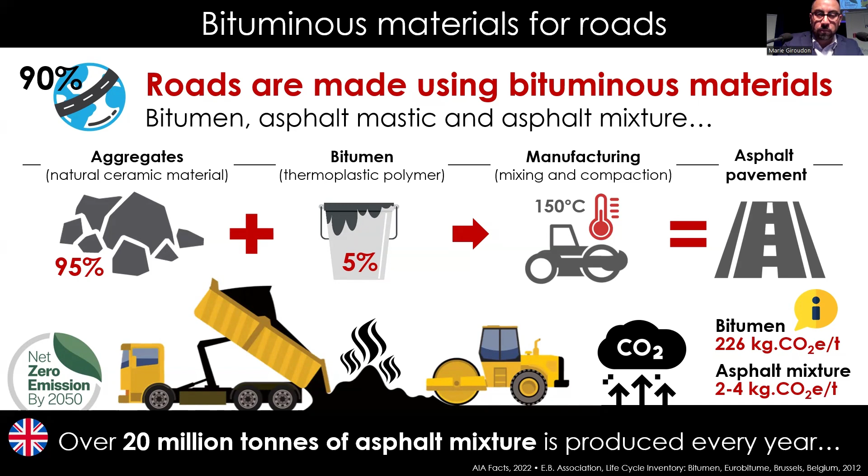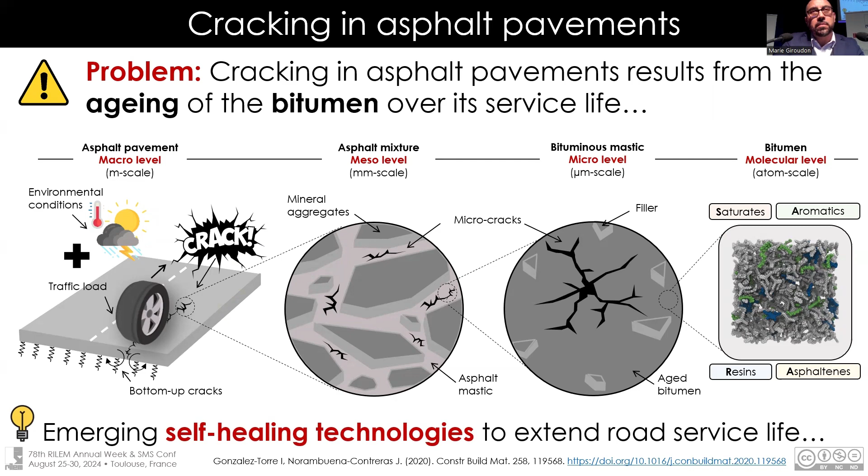To reduce this problem, in this keynote I'll discuss emerging self-healing technology to extend the road service life. Let me show you more detail about that.

At this point, the question is, what is self-healing asphalt? The key is the bitumen viscosity. Bitumen is a thermoplastic polymer with thermosensitive properties. Basically, bitumen is solid at road temperature, but when you increase the temperature, it can flow and close the opening of the crack autonomously.

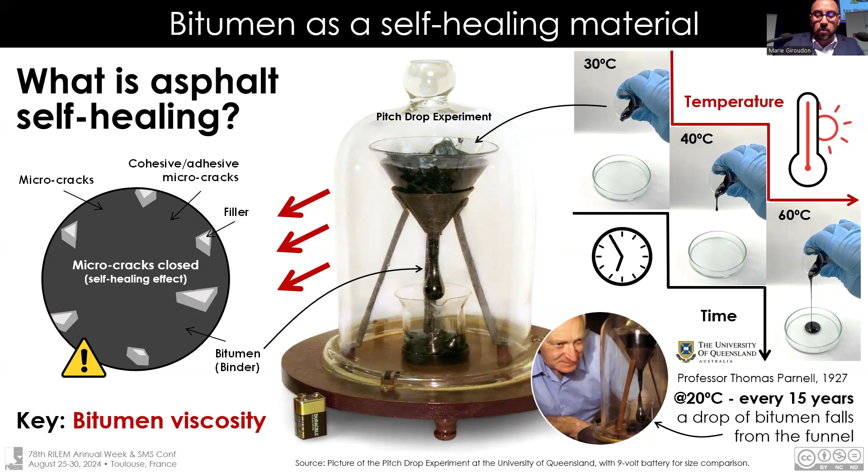So basically, we can produce self-healing materials. Bitumen is a self-healing material itself. But to increase this property and its application, we need to design different emerging technologies using extrinsic self-healing technologies.

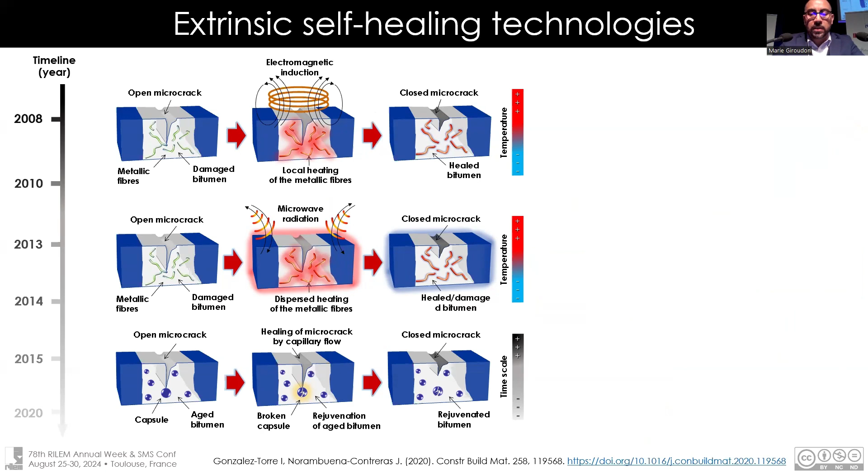To promote the healing properties of bitumen, we can use three different extrinsic technologies, classified into two groups. The first group concerns external heating. Here you can use induction heating: the asphalt mixture contains several ferromagnetic additives that are exposed to electromagnetic fields. Basically, you can increase the temperature of the bitumen and promote flow inside the open crack autonomously using this technology.

Another one is microwave radiation. You can incorporate metal or no metal, and it's effective either way. It's exposed to an electromagnetic field using radiation.

The next technology is encapsulated rejuvenator, an autonomous approach. Basically, you produce capsules with rejuvenator, an extender oil rich in components, with aromatic components, to stabilize the saturate-aromatic-resin-asphaltene ratio inside the bitumen. The broken capsule releases the contained rejuvenator inside the asphalt mixture, which reduces viscosity and improves the aged bitumen by diffusion, sealing the open microcracks.

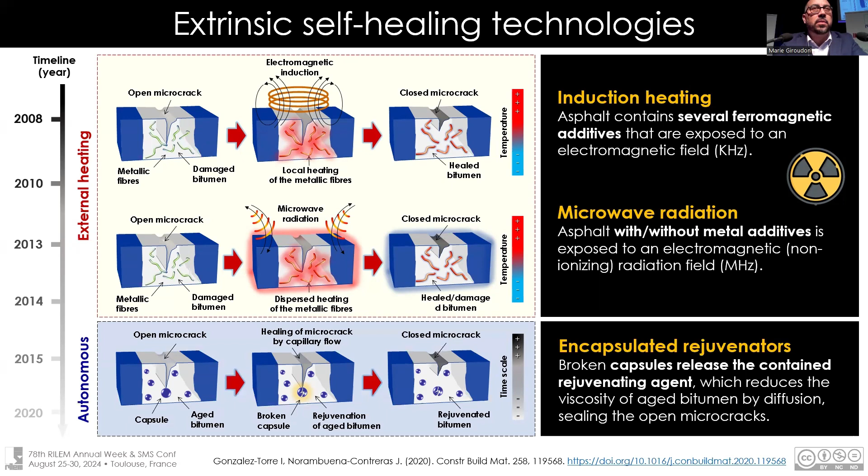So basically, using this technology, the concept of road maintenance and preservation over time has been refined. We need to extend the service life of the road, incorporating different emerging technologies to extend the service life and reduce CO2 emissions from asphalt mixture production and maintenance.

At the same time, if we evaluate the publications on this topic in the recent years, the last 15 years, we can conclude that this topic has grown exponentially.

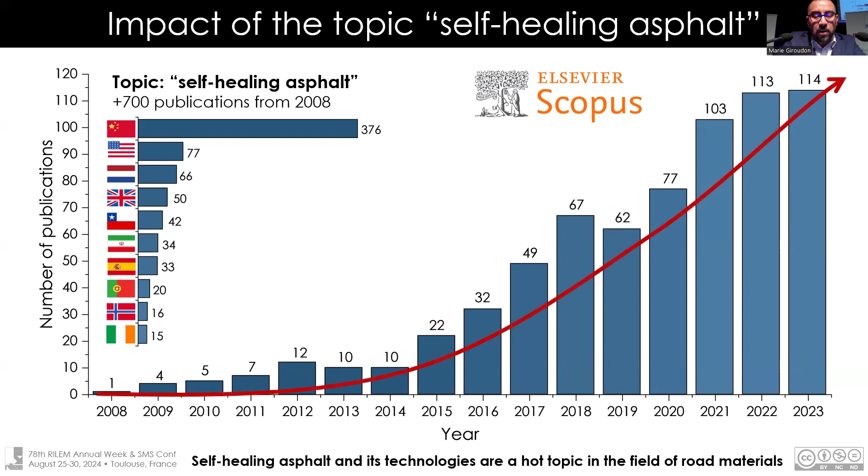Let me show you. Self-healing asphalt, in summary, is a hot topic in the field of road materials. I strongly believe that using waste sources combined with valorization processes, you can design new materials for asphalt and bituminous materials.

At the same time, you can contribute to different sustainable development goals, number 9 and number 11, to produce advanced transportation infrastructure, combining material science, civil engineering, and chemical engineering to produce self-healing materials.

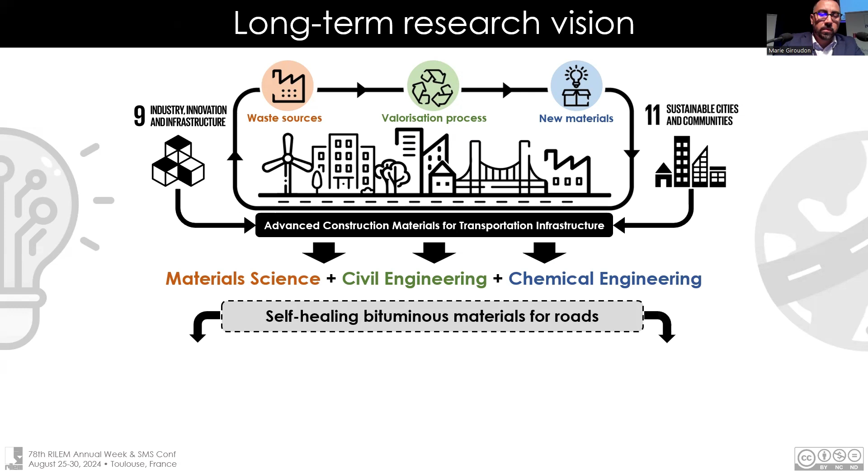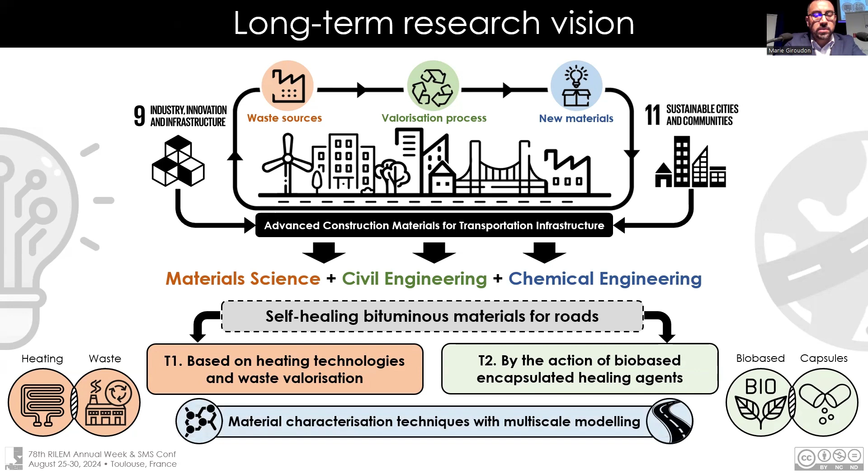This big research can be carried out using two different topics. The first topic concerns external heating technologies and waste valorization to produce self-healing materials. The second one uses bio-based encapsulated healing agents to produce self-healing materials. Both topics are carried out using material characterization techniques combined with multi-scale modeling to resolve both problems.

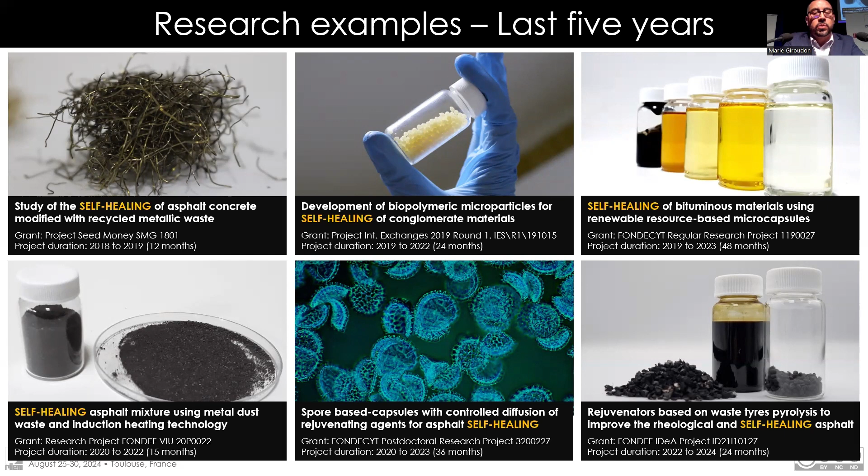For this presentation, I have selected 6 different projects to show you a brief overview of the research concerning self-healing asphalt.

In the first part, let me show you a few examples concerning the external heating approach. For example, we can use 3 different additives: electromagnetic additives, steel fiber from the cleaning industry, steel shavings from the manufacturing industry, and fibers from the tire industry. Basically, all these additives can potentially be used in asphalt mixtures for heating purposes.

Obviously, when you study the material's microstructural properties, you can complement designs and incorporate the new materials inside different applications.

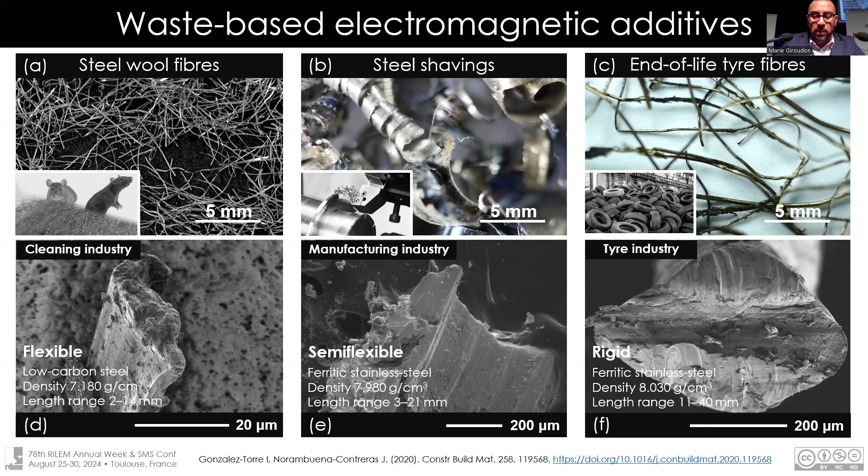During my time working in Switzerland at EMPA, during the last year of my PhD, we designed the first self-healing material applied in dense asphalt mixtures. For this purpose, we used steel fibers and induction heating.

Basically, to evaluate these materials, first we generate artificial cracking using mechanical testing, for example 3-point bending tests. It's also possible to use fatigue tests, depending on your purpose.

Then we use the pieces of the sample, piece them together in this sophisticated support, and then heat them under the induction coil without contact.

After the sample is heated for a few seconds, you can stimulate the bitumen inside the materials, and you can promote the flow autonomously inside the materials.

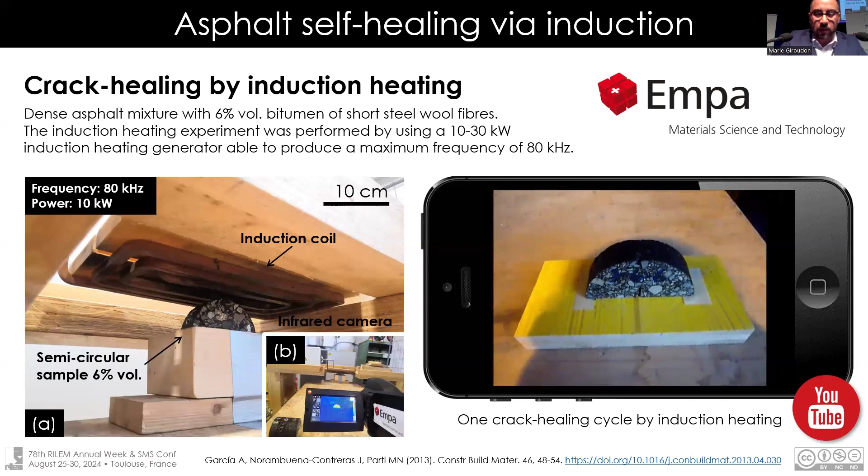After the sample cools to room temperature, we can manipulate it and check that the crack has been healed. Let me show you.

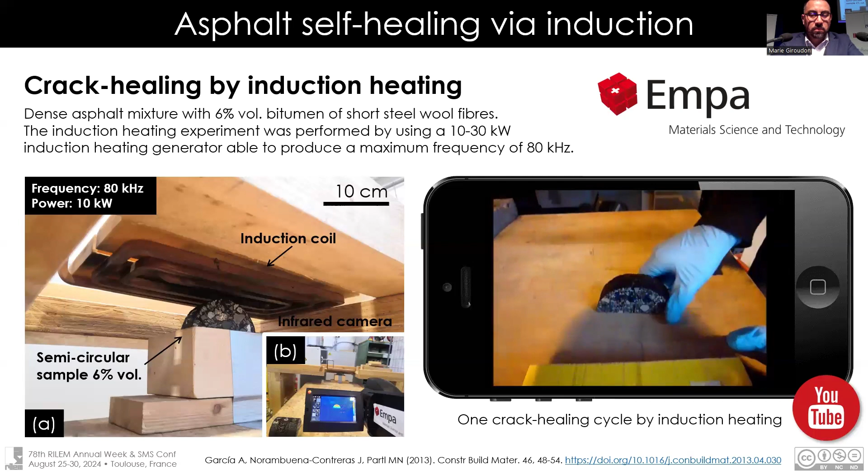But obviously, we must quantify the healing index before and after heating using mechanical properties, using different indices in order to evaluate the self-healing properties.

These samples contain fibers, steel fibers explicitly, so it's important to evaluate their distribution within the samples, for example by using computed tomography.

The recommendation, after evaluating 1,000 tests, is to use short fibers at a low addition percentage with a diameter close to 0.2 millimeters.

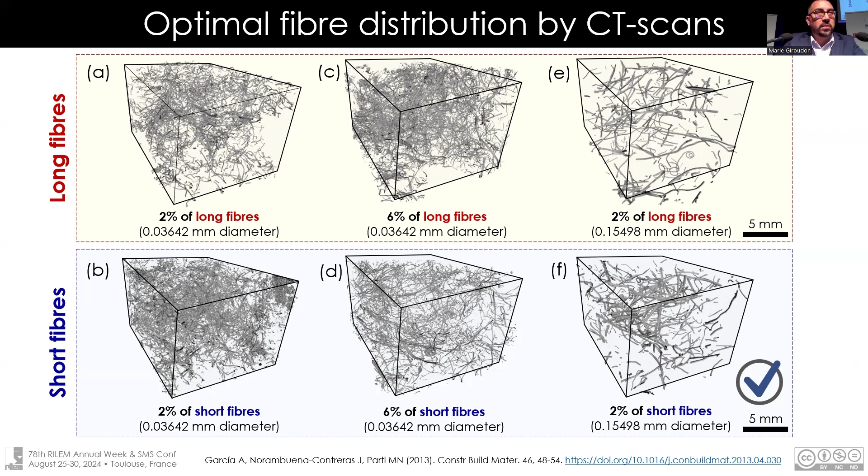On the other hand, it is also necessary to evaluate the heating time of the sample using microwave radiation in order to compare with induction technology. Thus, the effective amount and optimal time allow us to compare microwave radiation with induction heating.

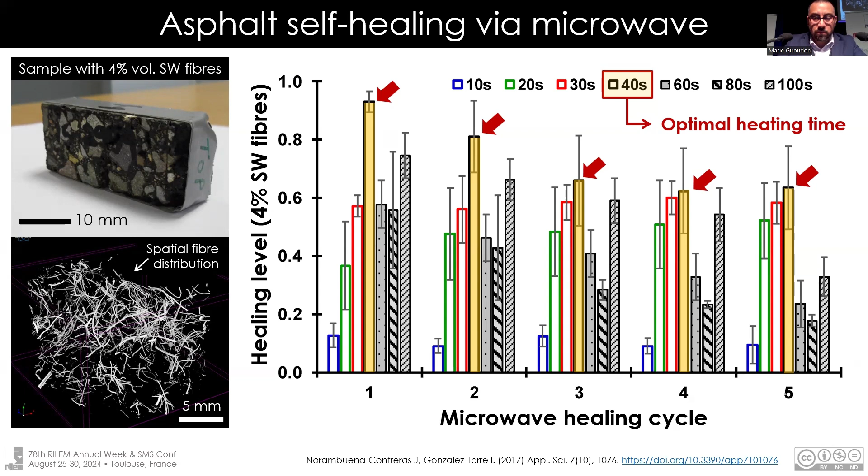For that purpose, it's necessary to design pretty easy tests in the lab. Basically, using a microwave oven, you can heat samples, not your food, please. After that, you can evaluate using a camera the temperature distribution inside the materials over a specific time, in order to evaluate the closing of the crack autonomously by effect of the microwave radiation.

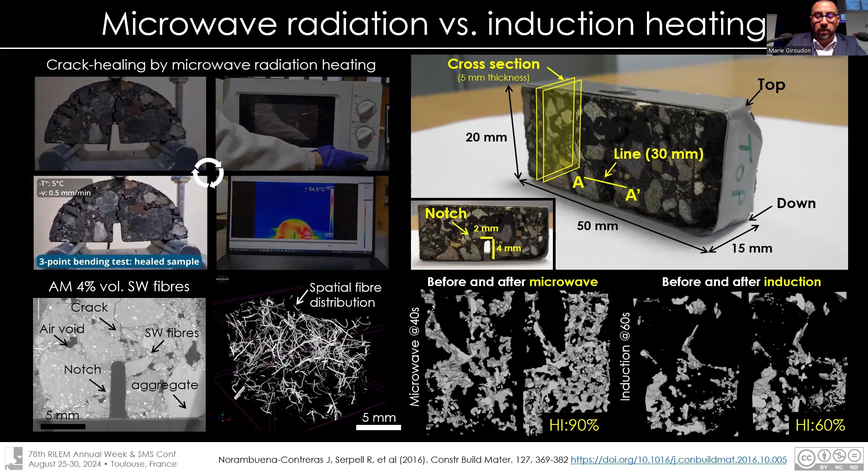You can also compare this result, the time and energy, with induction technology. Comparing both heating technologies has shown that microwave can achieve a higher healing index over time, but they can also affect the microstructure of the asphalt mixture.

For example, you can produce hot spots when you expose the material to high temperature. The recommendation is to use induction heating in on-site conditions without affecting the asphalt mixture performance.

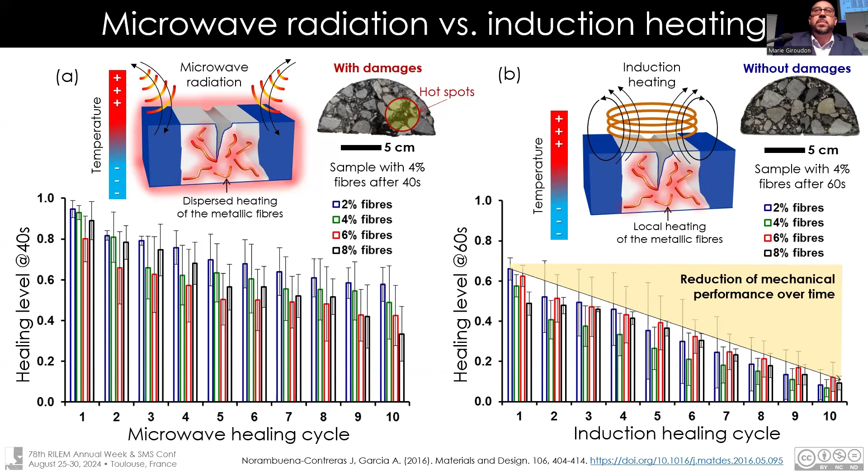Another example is to use steel shavings from metal manufacturing inside the asphalt mixture. In design, everything is possible - all kinds of waste can be used for asphalt healing purposes.

In this case, this additive can also be combined with the use of reclaimed asphalt pavement to produce a more sustainable mixture. In this research, we compared both materials, the reclaimed asphalt pavement with a small addition of steel wool fiber and steel shavings, to increase the temperature inside the material using these waste material aggregates.

At the same time, we can use steel fibers to stimulate the materials, but this fiber is so complicated to work with because it's necessary to produce several modifications in the mixing process to obtain a very good asphalt mixture. But it's possible to heal the samples.

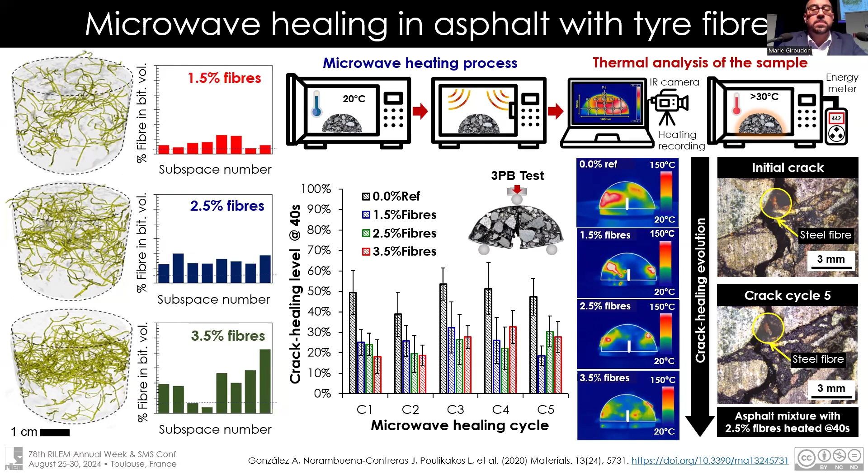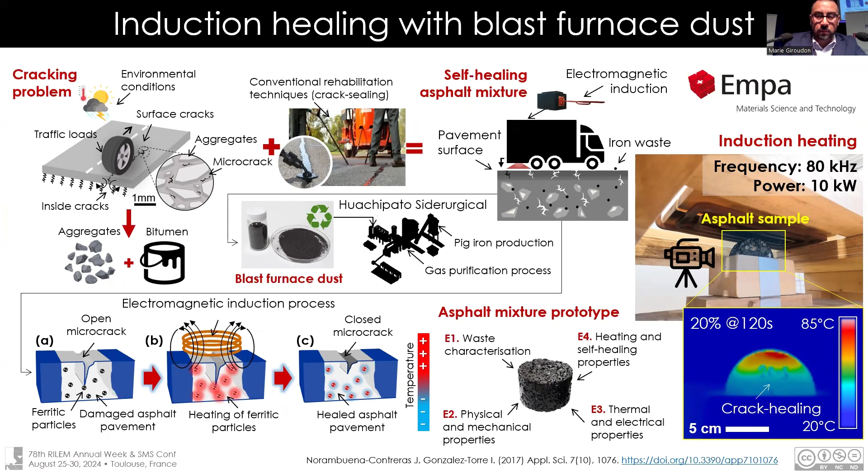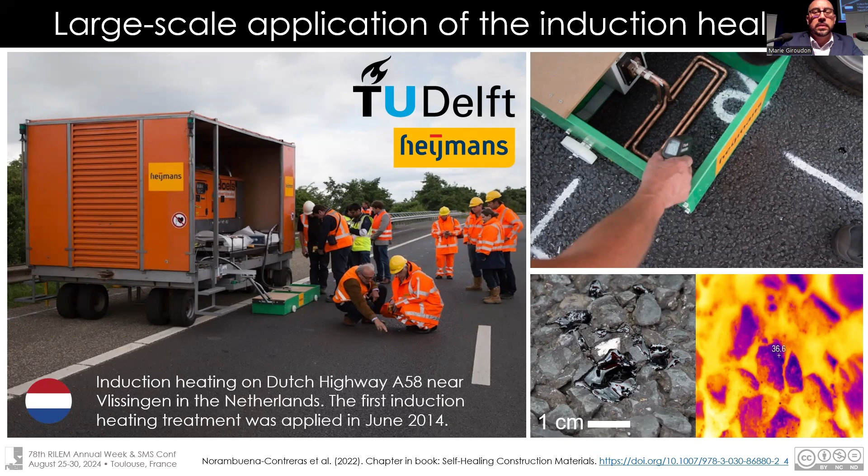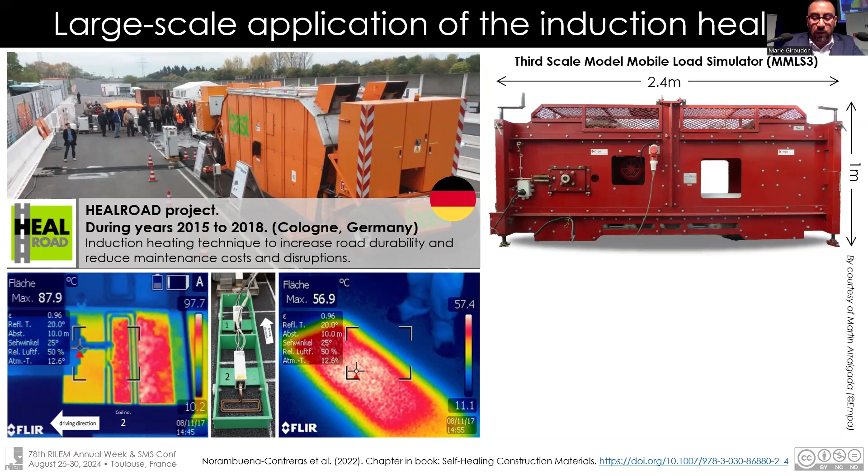The second example is a large-scale application recently carried out in Germany, a more current example. In this case you can simulate real cracks on the surface of the roads, and after that apply induction heating in order to close the crack autonomously. At this point, the encapsulated rejuvenator technology becomes necessary and very useful for healing purposes without human intervention.

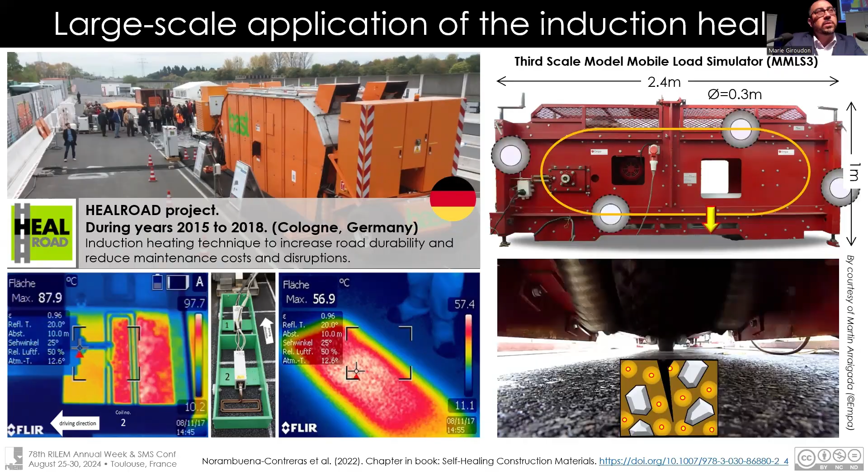In the next part of the presentation, let me show you a few examples concerning encapsulated rejuvenator resources. Under my vision, the following equation can define the preparation of the encapsulated rejuvenator for more sustainable roads.

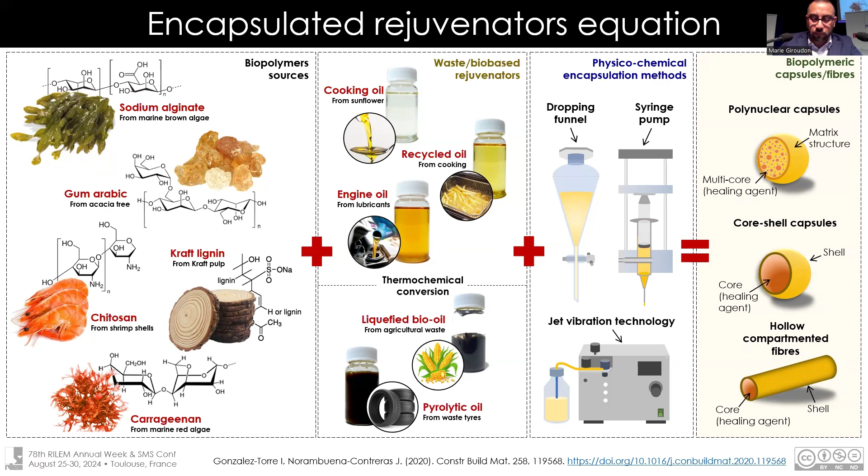Combined with physical-chemical encapsulation methods, you can produce several biopolymer capsules with different purposes, such as polynuclear capsules, core-shell capsules, and fibers. In summary, you can prepare different types of capsules by combining these materials and methods.

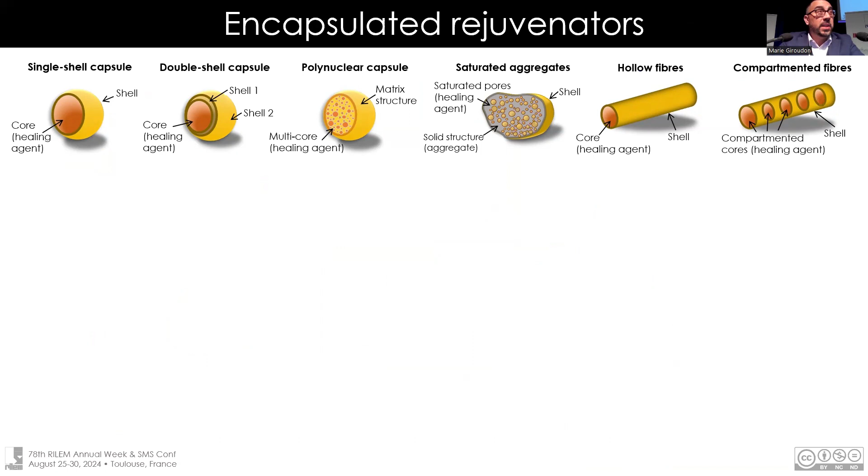Due to time limitations, let's look only at polymer capsule examples. Remember, the capsule releases the rejuvenator with reduced viscosity, and the aged bitumen seals the opened crack by effect of an external trigger - mainly a pressure or a traffic trigger.

When you produce capsules, it's very important to design very good emulsions. The emulsion is a combination of the polymer, rejuvenator, plus water. This is very important in order to achieve a very good capsule, in this case polynuclear capsules. At the same time, different physical parameters are interesting to analyze, such as the creaming index in the emulsions and different properties.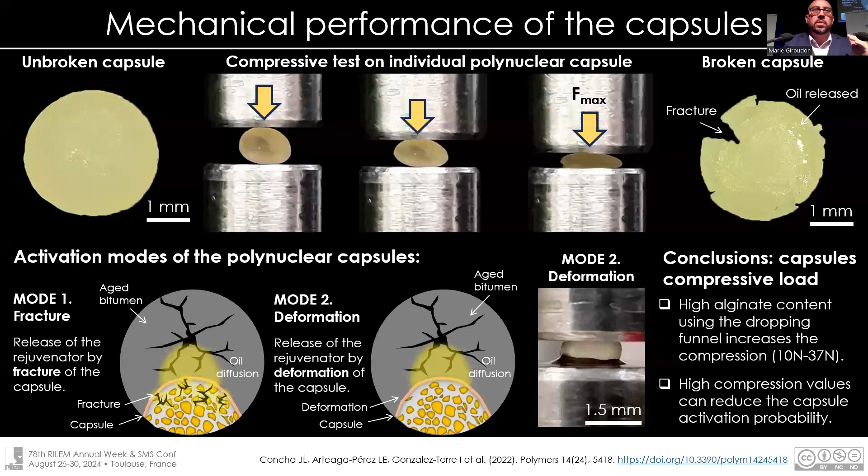Because a polynuclear capsule is like a foam, when you apply pressure you can release it in small amounts several times, depending on the traffic. For that reason, you can produce breakage of the capsule in the first mode, and in the second mode you can produce deformation over several times.

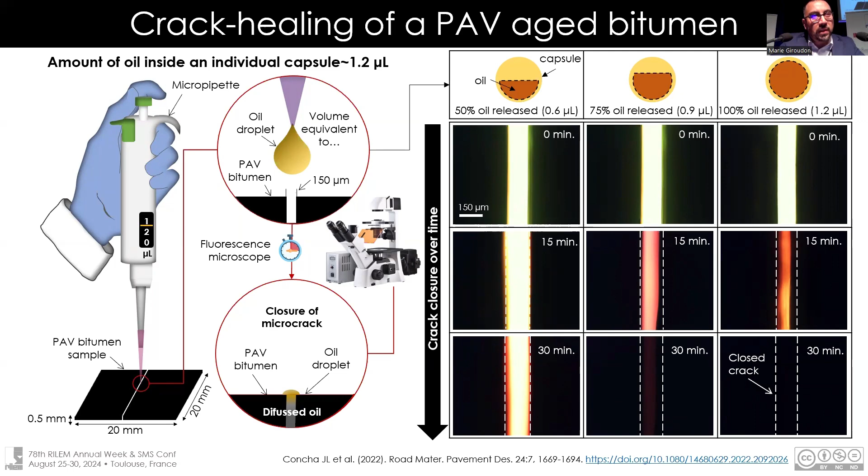Thermostability condition of the capsule is so important because you can produce asphalt in hot conditions, but the capsule needs to survive inside the asphalt mixture. You can complement the capsule with different solutions in order to increase the mechanical property and thermal resistance. Basically, the capsule resists the asphalt thermal condition and the asphalt compaction conditions.

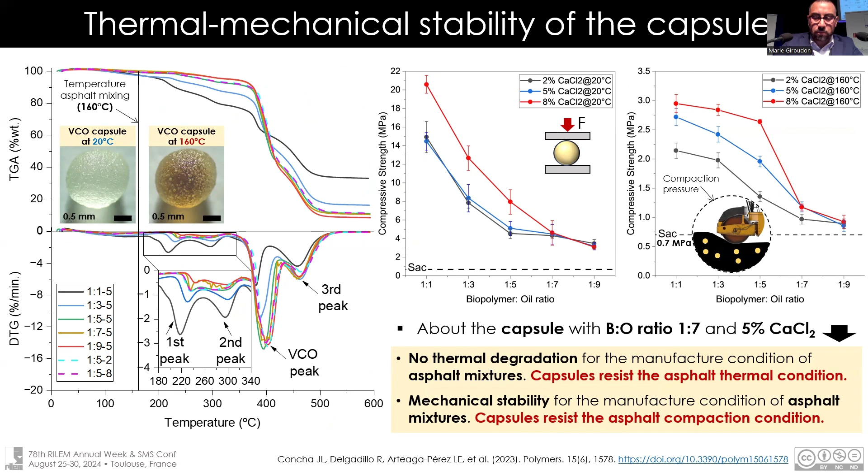Several tests using mastic. Mastic is a combination, in this case, of bitumen plus small pieces of aggregates and capsules. You can evaluate the rheology properties of the mortar because it's important for evaluating the mechanical behavior of the asphalt mixture in real conditions. We can modify and improve properties using capsules, but you need the exact amount of capsule in order to avoid effects on asphalt performance.

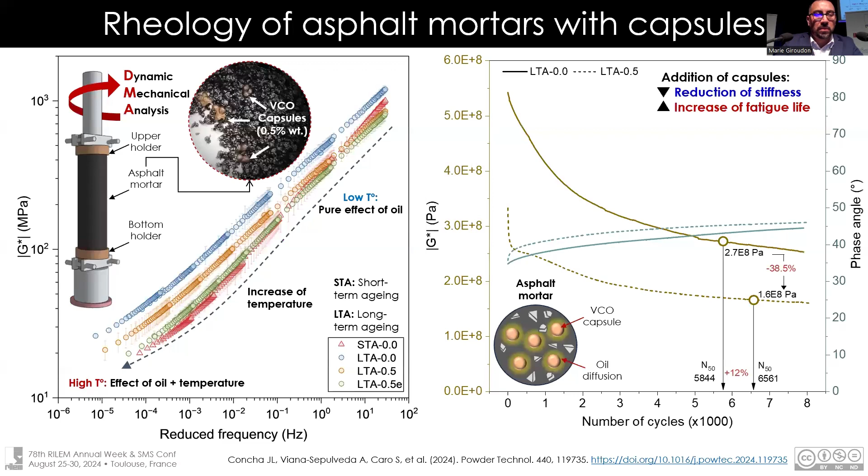Another challenge is to design new tests in order to stimulate the capsule inside the asphalt mixture. You can design capsules, that's fine. The next step is to incorporate the capsule inside the asphalt mixture, that's correct. But what is the next step? It's to activate the capsule under laboratory conditions.

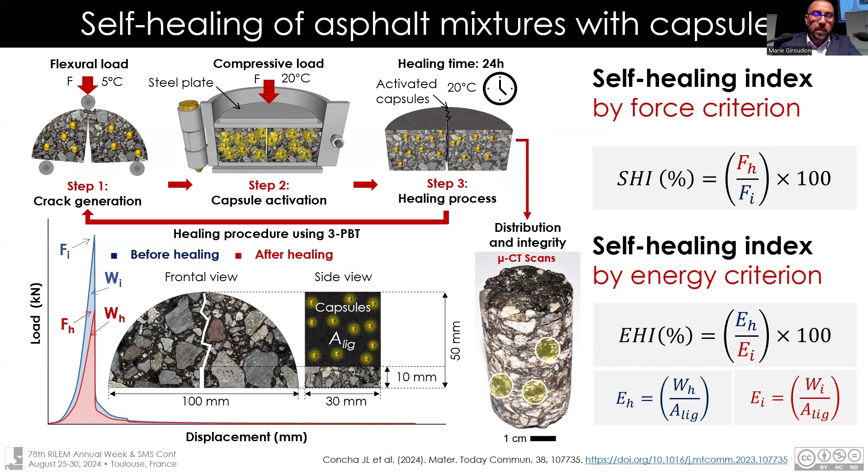For that reason, you need to design a specific test using mild compression in static and dynamic conditions in order to stimulate the capsule inside the asphalt mixture. After that, you can design different self-healing index by force criteria. You can calculate the curve, and the area under the curve in order to use the energy, for example. Independent of the healing index, you can increase the self-healing index inside the asphalt mixture.

Please remember that bitumen is a self-healing material itself. For that reason, you always need to compare your results to materials without additives. In this case, we can increase up to 20% of the healing index compared to asphalt mixture without capsules. When you use, for example, the self-healing index using force, this result can change when you compare it with the energy.

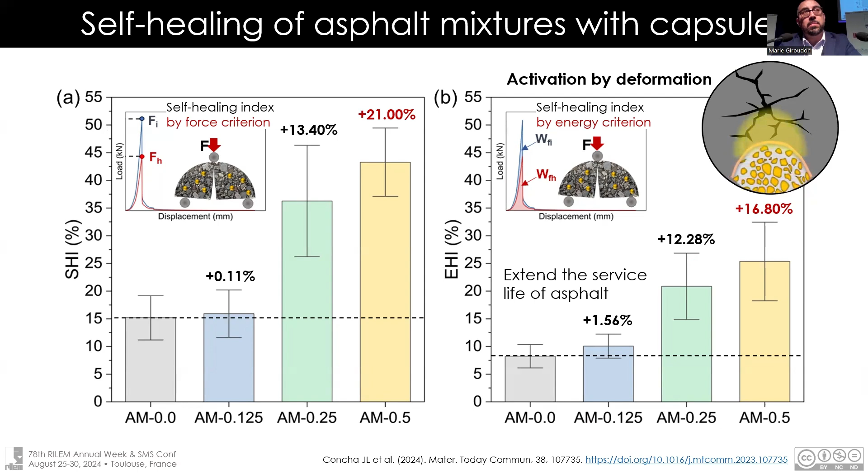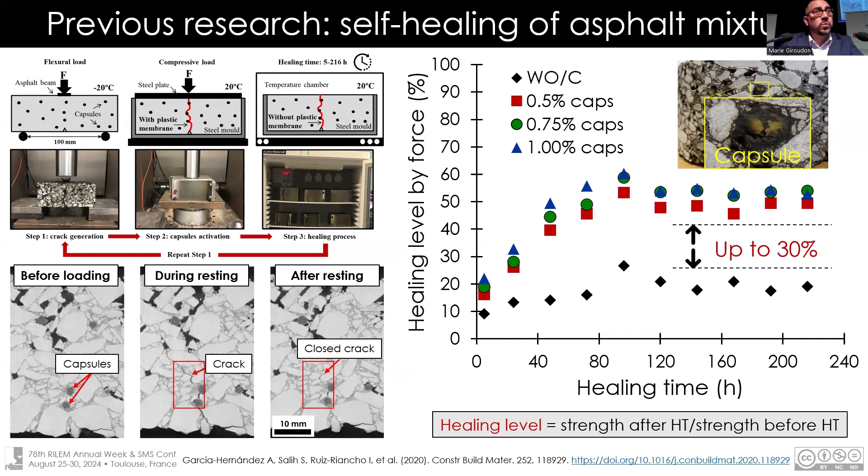This is very difficult to simulate in laboratory conditions. At the same time, you can use CT scan, computer tomography, to evaluate the distribution of the capsules inside the asphalt mixture.

For example, you can delete the different aggregate mastic and see the distribution of the capsules inside the core of the asphalt mixture. You can evaluate the distribution of the capsule, the diameter of the capsule after mixing and compaction, and also evaluate the effective distribution of the capsule.

Basically, the capsule resists the mixture manufacturing process. The capsule breaks inside the mixture due to the effect of extrinsic loading, in this case static condition or fatigue conditions. The capsule shows a very good distribution inside the asphalt mixture. But what is the next step?

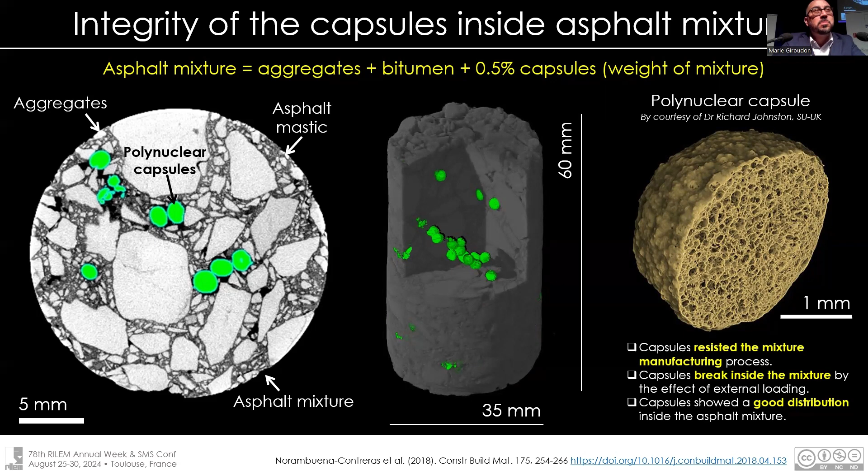The next step is to anticipate the performance of the capsules. You can use CT scan, but also different computational approaches to design a virtual model of the asphalt mixture with different combinations of capsules. You can simulate dynamic tests using finite element methods in order to evaluate the probability of the number of capsules possible to activate inside the asphalt mixture, in order to increase the self-healing properties inside the material.

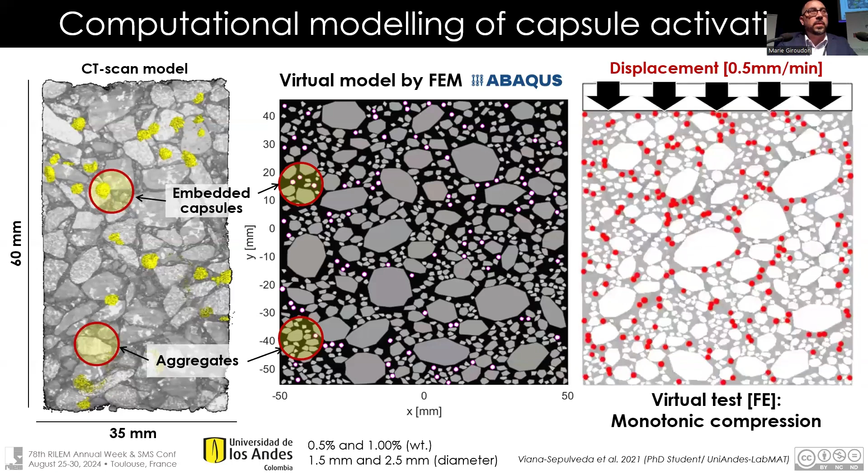In the final part of my presentation, I would like to show you work in progress. Sometimes it's published.

This is amazing research concerning designing microcapsules using nature. Basically, we can use natural spores and saturate them with our rejuvenators to design microcapsules with properties to control the release autonomously. This research was carried out in collaboration with Swansea University, MIT, and my colleagues in Chile. In summary, it's possible to design microcapsules with self-healing properties using nature.

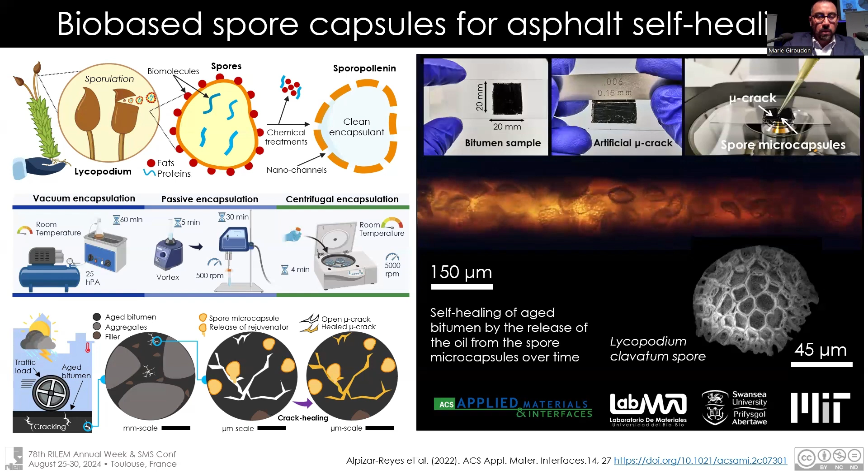A second example is a collaboration between Wuhan University and Hertfordshire University in the UK. Basically, we can design fibers with rejuvenators of different conditions, sizes, and properties, using a specific microfluidic device to create specific shapes and conditions. We can combine two different rejuvenators inside the fiber: one for concrete purposes and the second for asphalt purposes. Everything is possible, unfortunately, in design.

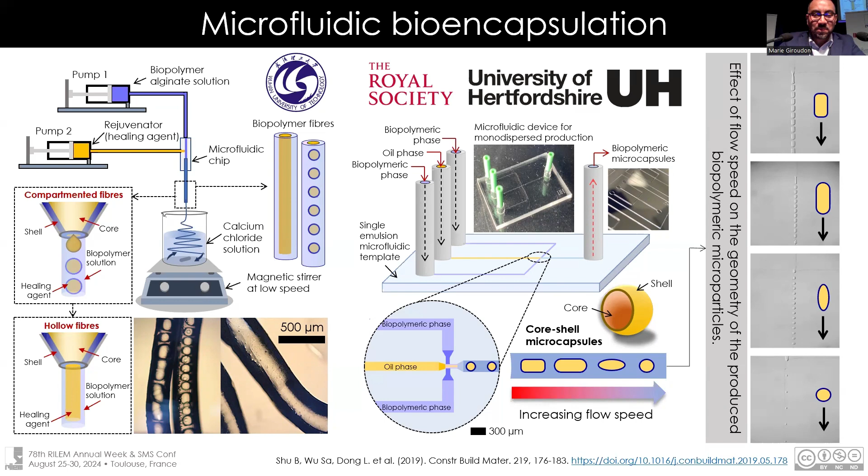This is my favorite research. Basically, we can use end-of-life tyres and thermochemical conversion, for example pyrolysis, to produce specific rejuvenators, specific liquids, specific components. In the lab, you can increase, using different chemical approaches, the terpenes and monoaromatic components inside the material in order to stimulate the specific molecules inside the asphalt.

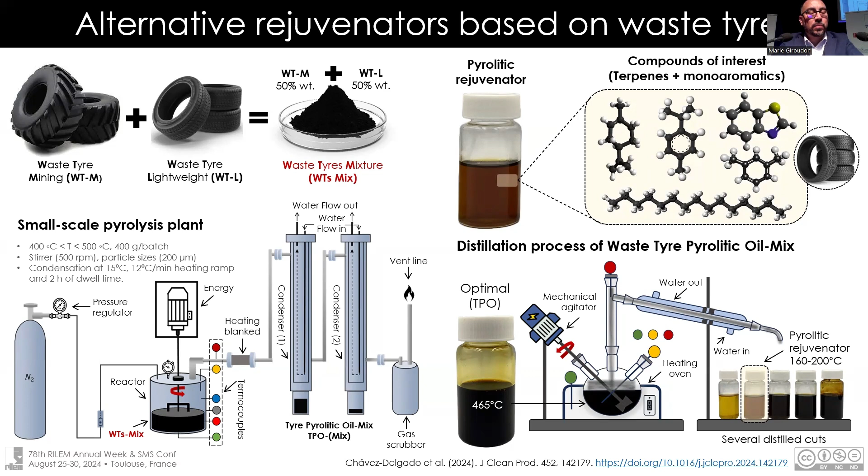That is possible. At the same time, it's possible to encapsulate these rejuvenators using biomaterials. You can produce them using jet vibration technology. You can produce, for example, polynuclear capsules. You can produce core-shell capsules with different purposes.

You can evaluate the specific emulsions. You can modify the emulsions with different purposes. At the same time, it's possible to evaluate the mechanical properties of the capsule, not only for asphalt purposes. At the same time, you can incorporate it into coating solutions for composite materials as well.

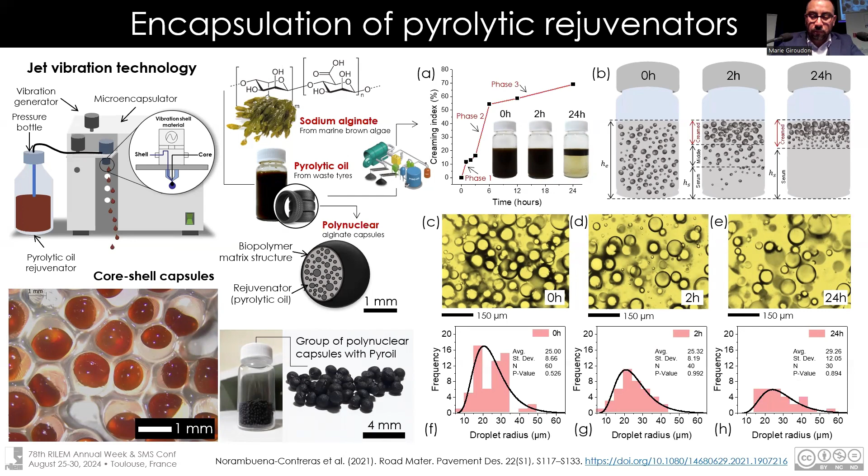The rheology of these materials, the combination with the pyrolytic oils or capsule-incorporated pyrolytic oil inside, relates to the capability of the pyrolytic rejuvenator using the self-healing index.

You can use the DSR test in order to stimulate the sample. You can produce micro cracks, and you heal the cracks autonomously using this material. You can design different healing indices, similar to the mechanical test, in order to evaluate and quantify the properties. Basically, we can increase performance using this specific rejuvenator based on waste, a problematic industry waste.

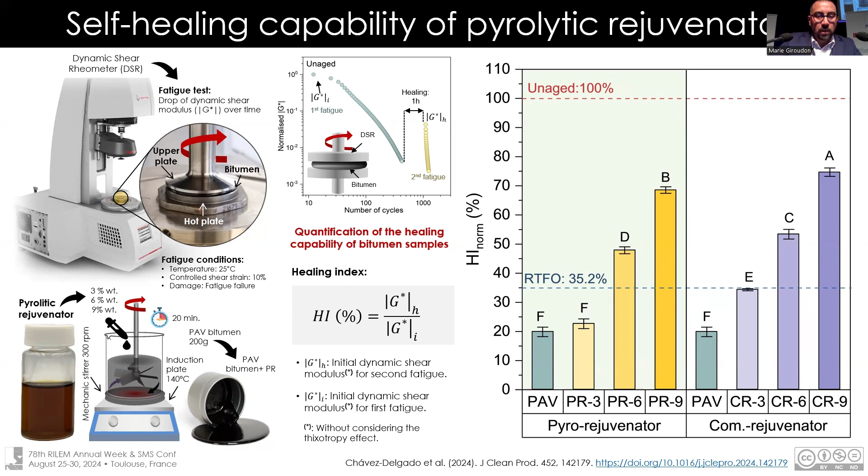At the molecular level, it's possible to use molecular dynamics to evaluate an important process when you use rejuvenators. The name is diffusion. Diffusion is very, very important because if you can control the diffusion, you can increase the properties of the rejuvenator inside the materials. That is very difficult to evaluate under laboratory conditions using microscopy, for example. It's necessary to incorporate a molecular dynamics approach in order to evaluate this phenomena, and you calculate the diffusion coefficient, etc.

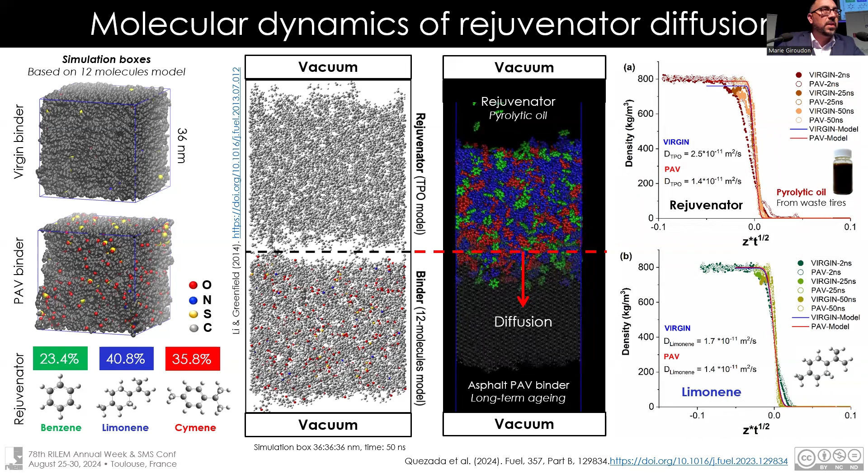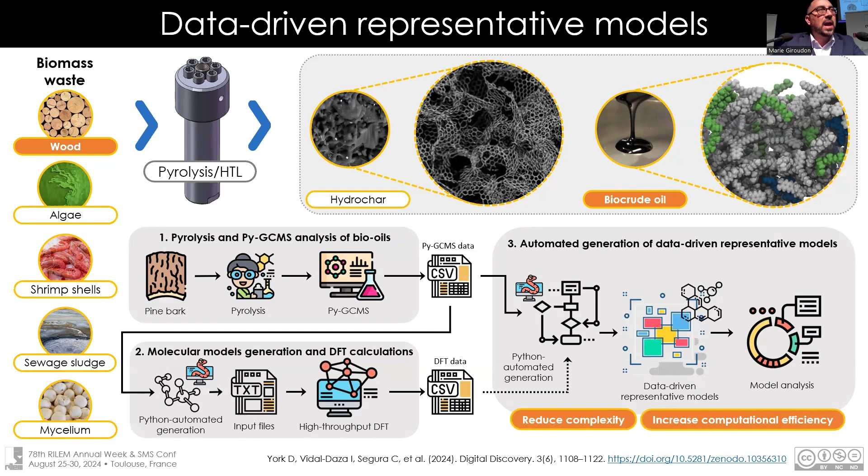For that reason, it's necessary to say, Google, please help me. On the Google Cloud, it's possible to simulate these specific materials.

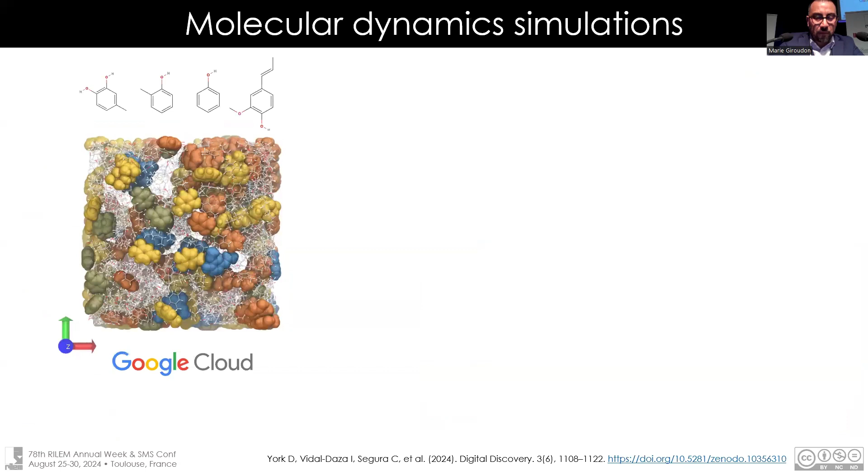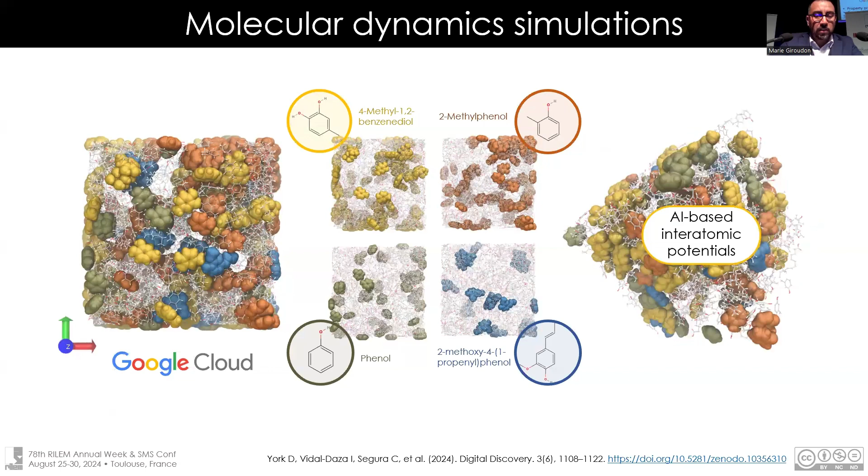For example, in this approach, if we isolate only the phenolic component inside the bio-asphalt, let me show you. Basically, we can use molecular dynamical simulations combined with different technology, artificial intelligence, to evaluate the interatomic potentials inside the material, in order to obtain the perfect bio-asphalt to replace the bitumen based on petroleum.

It's possible to measure property predictions: density, viscosity, and other properties. It's possible to design a computational approach to replace normal bitumens, because we have, for example in RILEM, a very big commitment in order to reduce emissions for the future. That's possible, and necessary.

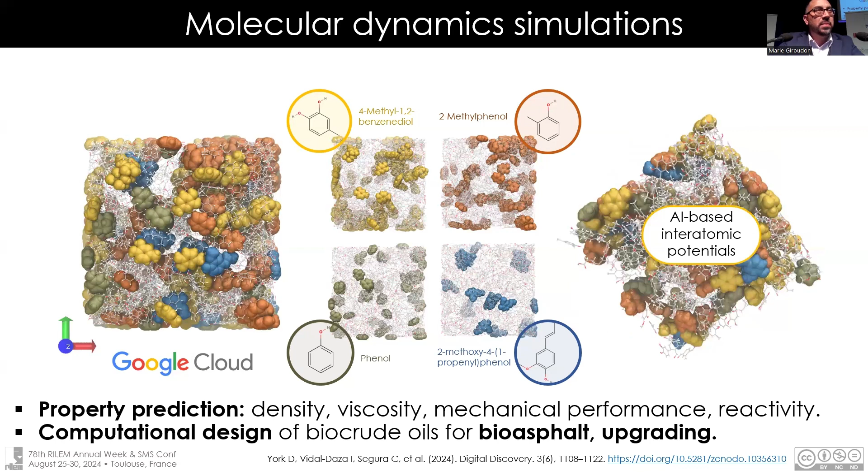In conclusion, I would like to highlight 4 different topics. The first is that external heating technology based on metallic waste can extend the service life of the asphalt pavement by up to 50%. However, this can also affect the physico-mechanical performance of the asphalt mixture.

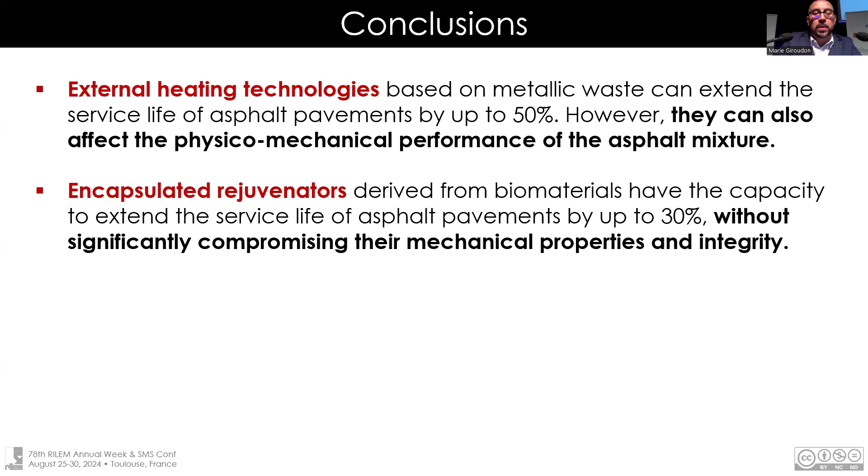Concerning the encapsulated rejuvenators based on biomaterials, we have the capacity to extend the service life of the asphalt pavement by about 30%, without affecting the mechanical properties and integrity of the asphalt mixture.

More fundamental research using a computational multi-scale approach is needed to understand the asphalt healing process, influenced by the complex chemical reactions produced by biomass waste. Lastly, multidisciplinary collaboration is essential to address the scientific questions linked to asphalt healing for a net zero circular economy.